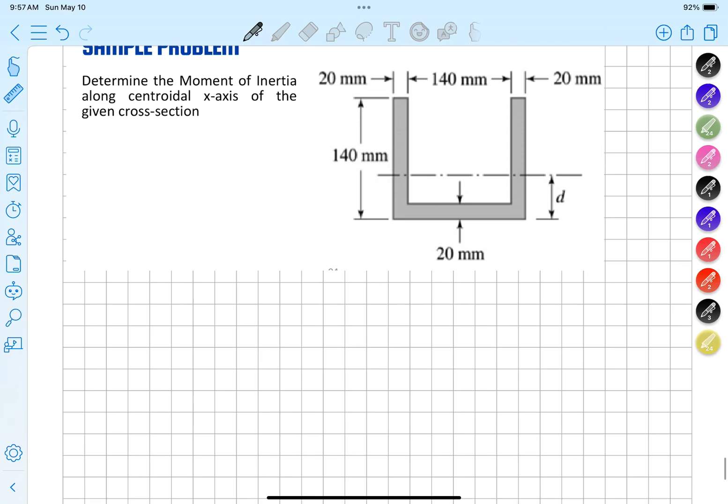For sample problem number 1. Determine the moment of inertia along the centroidal x-axis of the given cross-section. So that means, we need to locate where the centroid is.

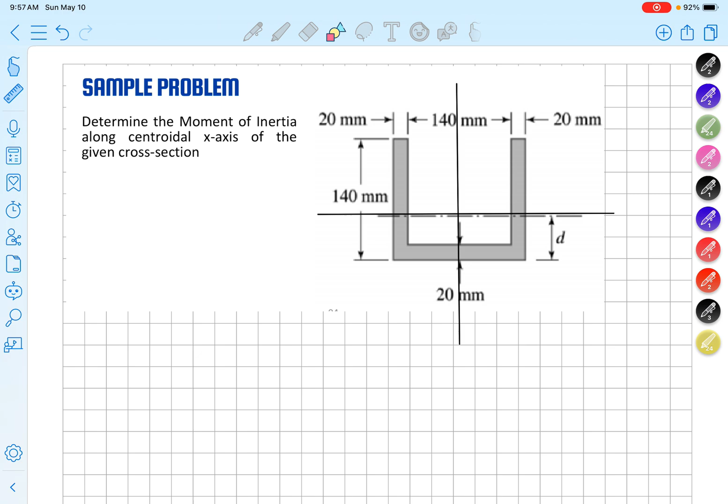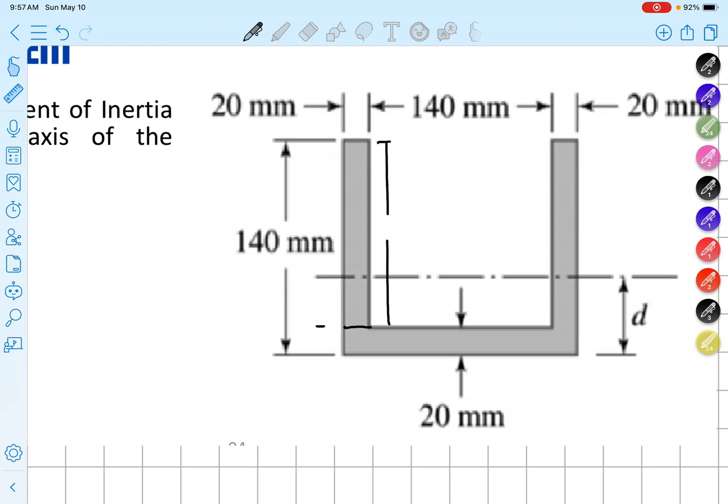If this is 20, the thickness, what is this now? So this is 120. If this is the same, this is also 120. And if this is 140 in the middle, plus two 20s on the sides, this is 180.

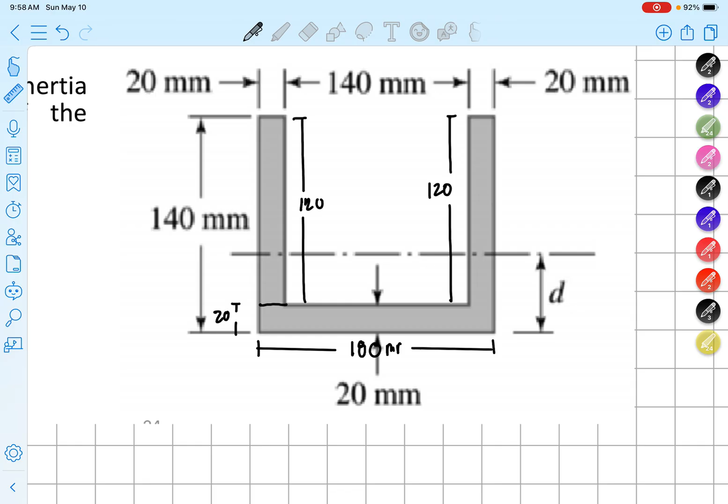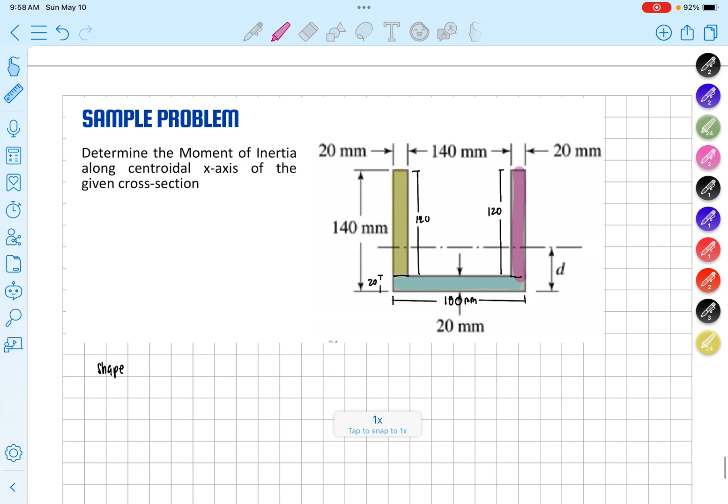So this is what we'll divide. This is shape 1, and then we have shape 2, and shape 3, which follow next to each other. So we have shape 1, 2, and 3. This is 1, this is 2, this is 3.

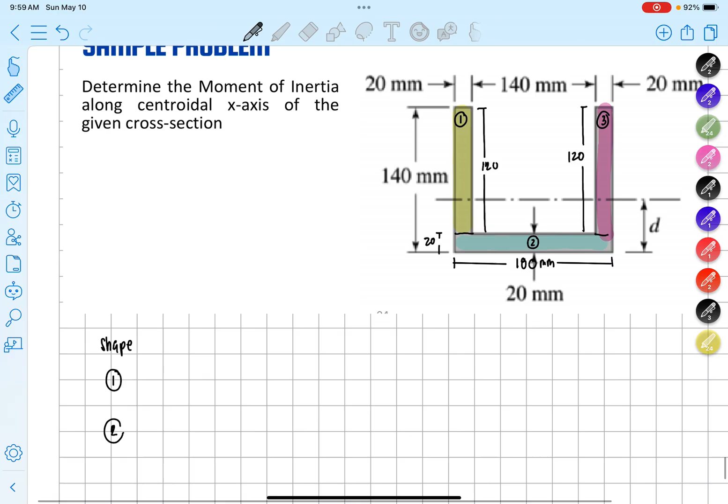For shape 1, we have 1, we have 2, and then we have 3. For area, what is the area of 1? We have 120 times 20, which equals 2,400.

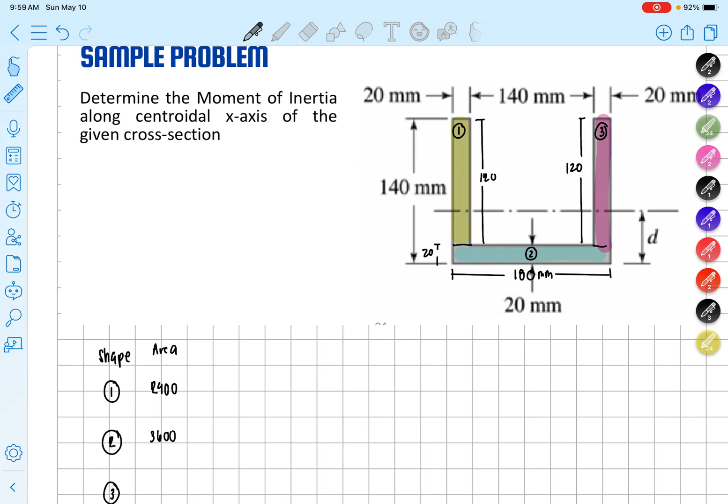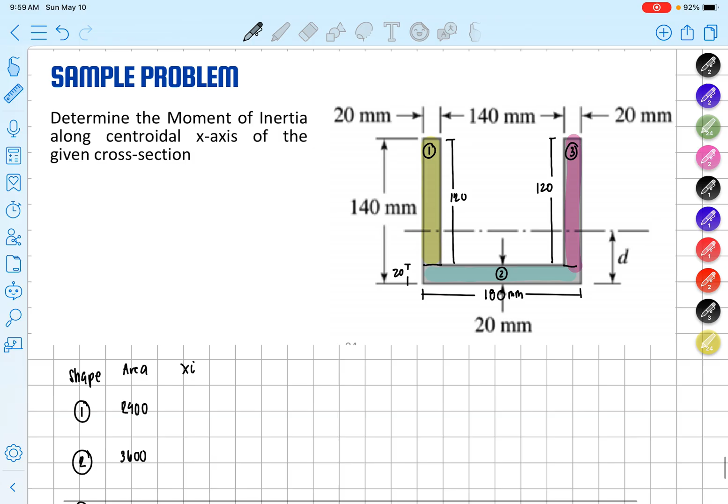What's the area of 2? We have 180 times 20, so that's 3,600. For area 3, it's the same as area 1, we have 120 times 20. Now for xi, distance from... let's place our reference axis.

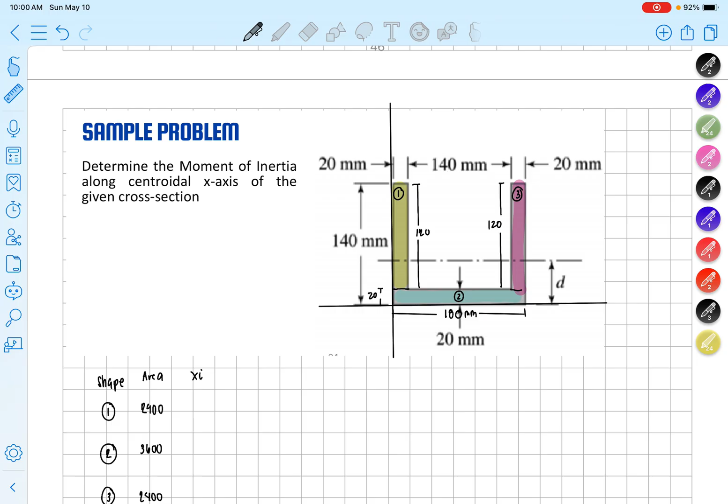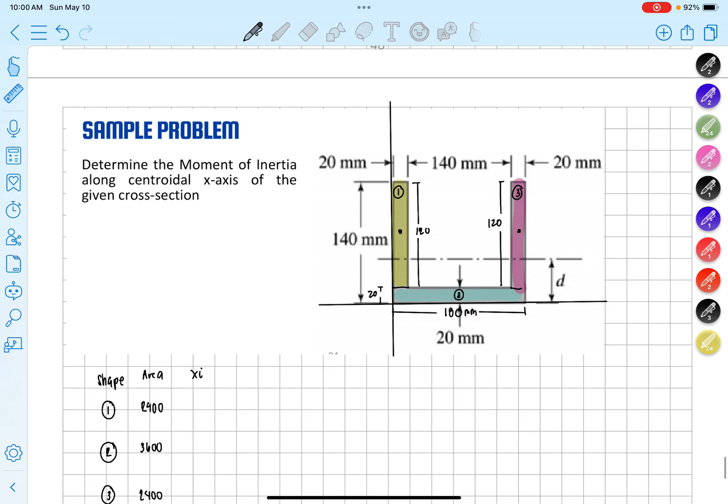From here, we locate the individual centroids. That's the individual centroid, one in the middle here, and another in the middle there. So what's the distance of this? That's 20 over 2, so this is 10.

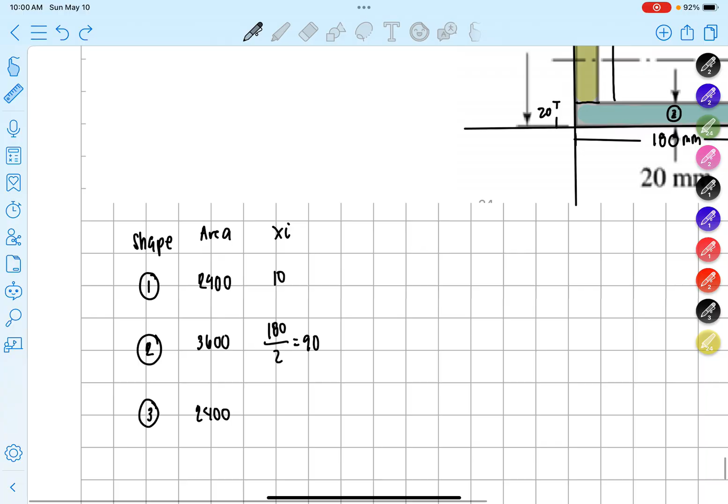Next we have AXI. In this case, 2,400 times 10 is 24,000. 3,600 times 90 equals 324,000. And for 2,400 times 170, please double check this since it's not the centroid as our reference - that's 408.

So for our total area, we have 24 plus 36 plus 24, giving us 84. And for the total, this is 24,000 plus 324,000 plus 408,000, which equals 756,000.

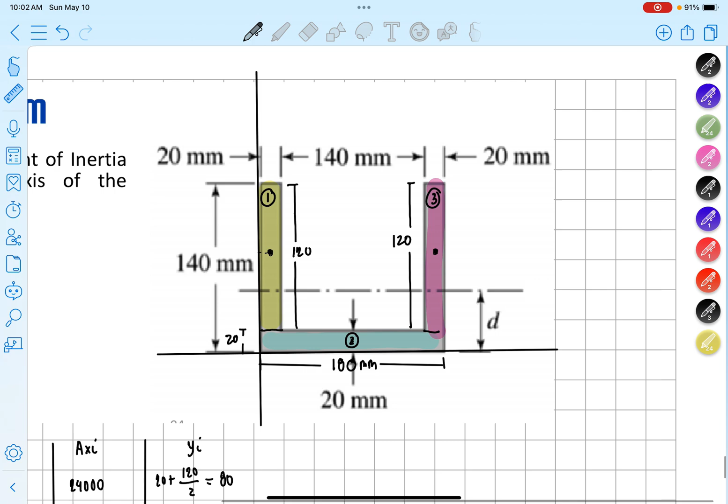And again, let's compute the AYI. Just multiply - 80 times 2,400 (area times 80). So 24 times 80 equals 192,000. How about 3,600 times 10, that's 36,000. And we have 2,400 times 80, again 192,000. Adding these: 192 times 10^3 plus 36 times 10^3 plus another 192 times 10^3, totals 420,000.

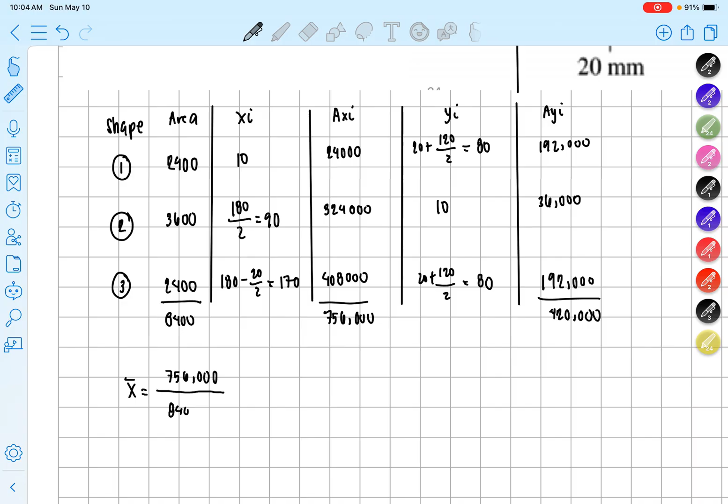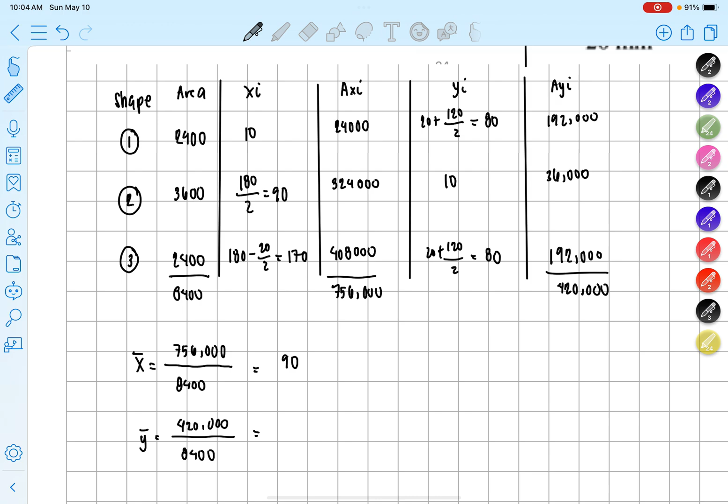So to get x-bar, this is simply equal to 756,000 over 8,400. And for y-bar, that's 420,000 over 8,400. This equals 90, if I'm not mistaken, and this equals 50. So that's your centroid, 90 and 50.

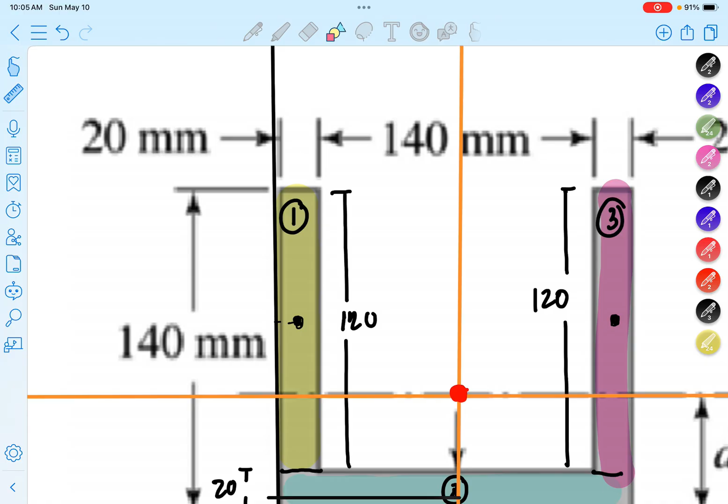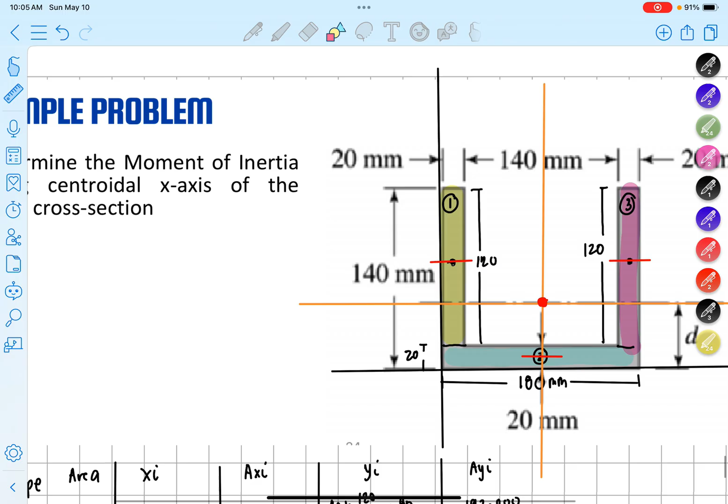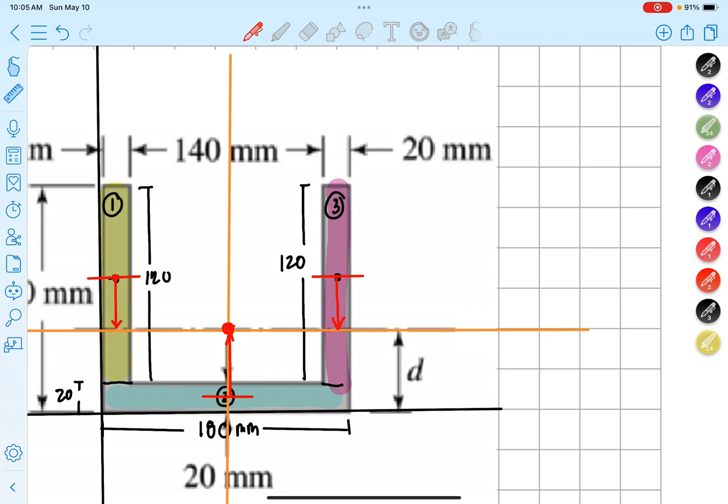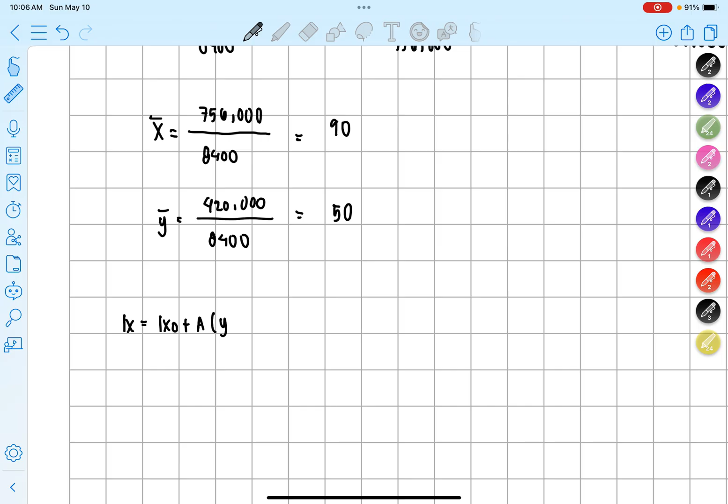Dadali natin dyan yan, papunta doon. By the way guys, yung D na to, ito yung tinatawag natin as ating y bar. Kaya kung mapapansin nyo kanina, yung formula natin, pagka IX na hinahanap natin, this is simply equal to IXO plus area y bar minus yn square.

Okay, so ibig sabihin, isa-isahin natin ngayon. Ang total natin, IX is simply equal to IX1 plus IX2 plus IX3. So ibig sabihin, pagka-plus-plusin mo ngayon, yan.

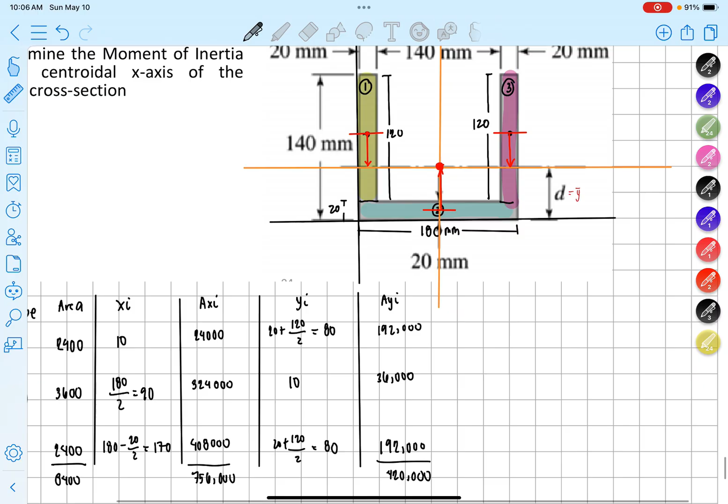Ngayon naman, for IX1, isa-isahin natin. Ano ngayon yung IX1 natin? Yung IXO. Alam nyo na yung shape 1 natin, etong part na to, is a rectangle, di ba? At para makuha natin IX niyan, based on the formula, yan yung BH cube over 12, base times height cube over 12.

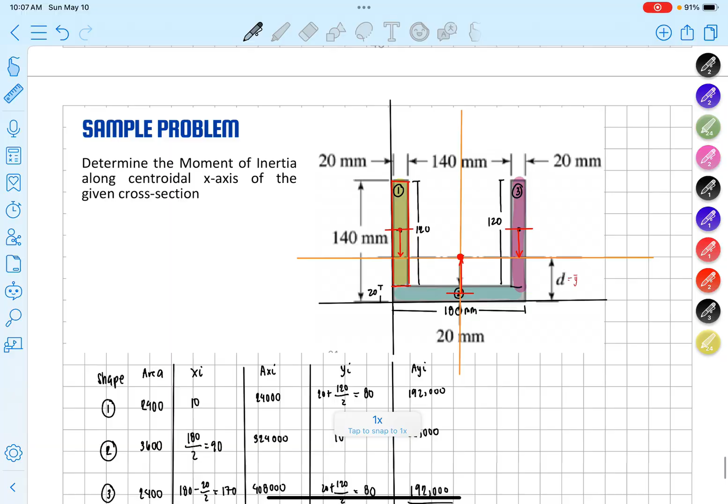So pag IX yung kukunin natin, technically pag sinolve natin yon for IX1, we have BH cube over 12. Ang base natin doon is 20, tama ba? Ito, 20 to. And then yung height natin is 120. So we have 20, height na 120 cube over 12.

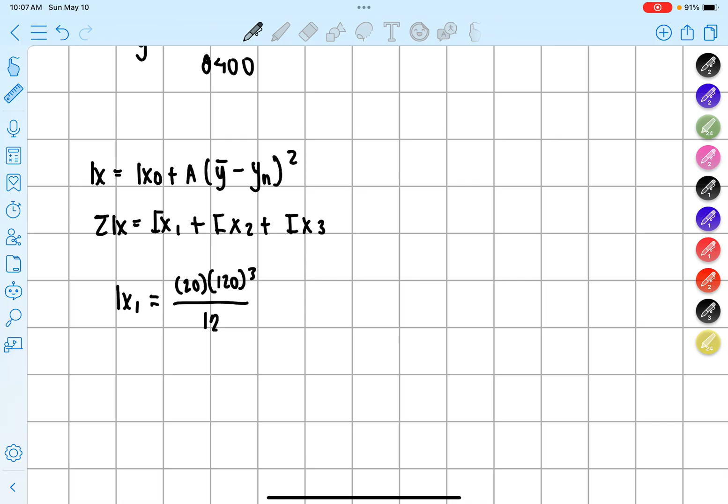Tapos tingnan nyo na lang, kaya maganda yung naka-table, plus area tayo, di ba? Ito yun, no? So ito, nakuha na natin yung individual centroid na formula.

Punta tayo sa area ngayon. Ang area natin, guys, for shape number 1 is 2,400. So ibig sabihin, we have 2,400. Ngayon, ano yung y-bar? Ang y-bar natin is 50, di ba? 50.

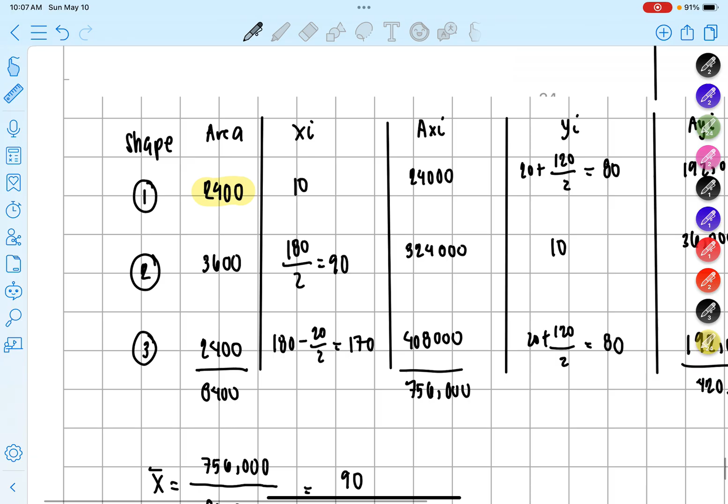Minus, ano ngayon yung y natin ng una? Di ba ito yung 80? So technically, this is 80 square.

Sir, paano po ba nangyari ito? Di ba guys, this is the distance. Ibig sabihin yun yung distance neto. Tingnan nyo, by the way, square yan. Di ba, ito yung portion na to. Ito yun. Ayan yun, ito yung distance na kinukuha natin, yan yung y bar minus y.

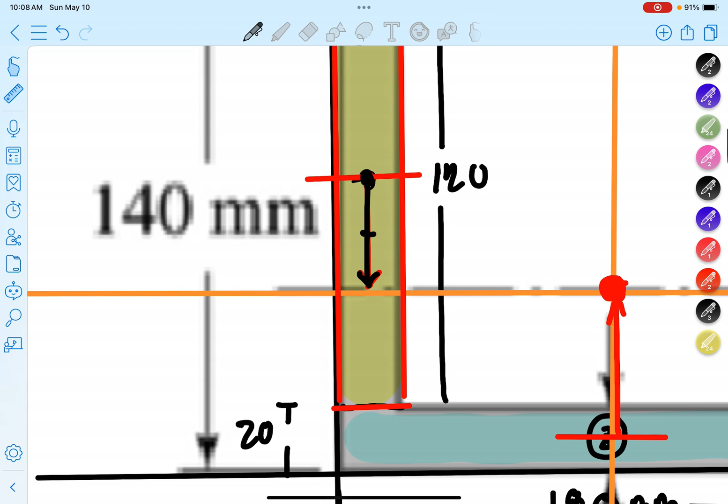Sir, paano nangyari yun? Kung titingnan mo, di ba ang y bar natin is hanggang dito? Tama? Ito yung y bar natin. Tapos yung yi natin na yan, di ba itong yi natin yan, di ba yun yung kinumpute natin mula sa pinaka-reference natin? Kaya tingnan mo, yung y natin na yan is 20, meaning 20 plus kalahati ng 120 na locate natin, na 80 yan.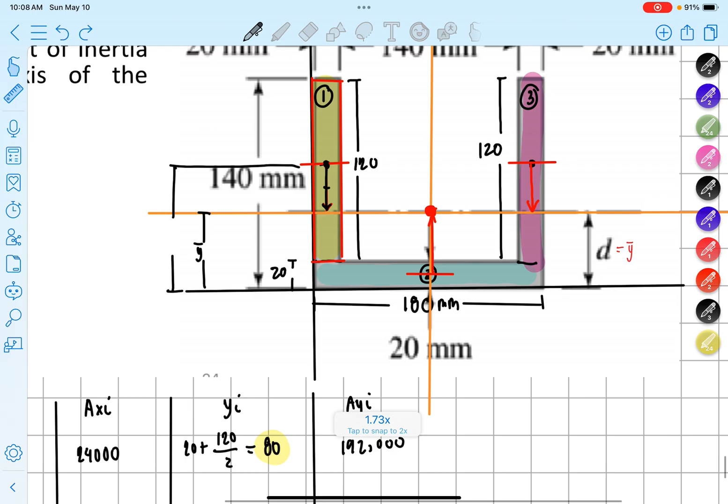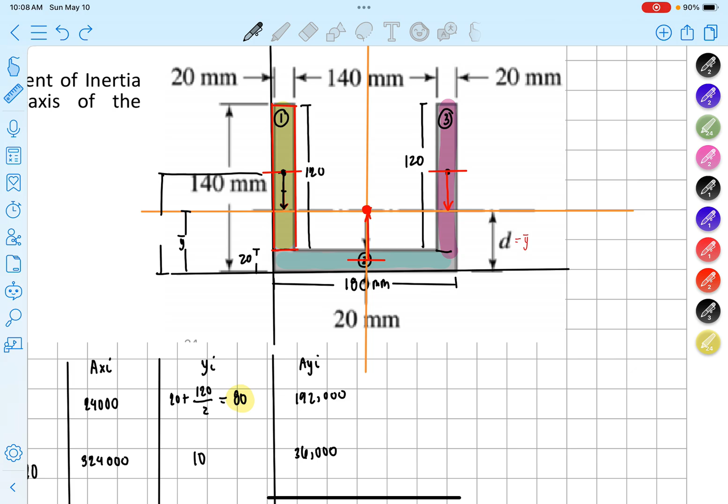Sir, di ba dapat 80 minus y bar? Okay lang yun guys, na y bar minus 80 para hindi na kayo magbabali-baligtad. Bakit? Kasi naka-square naman yan. Kung titingnan nyo, sir, di ba dapat 80 minus 50 yan?

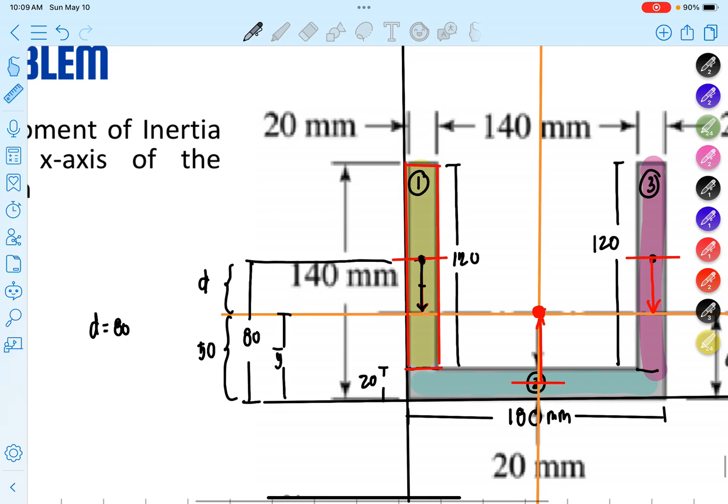Kasi, ibig sabihin, kung kukunin natin, sir, yung distance na to, itong distance d na to, at ito ay 80, at ito ay yung y bar natin na 50, di ba, yung d natin dapat is 80 minus 50. Tama? So dapat po pala, sir, yn minus y bar.

Guys, okay lang yun. Bakit? Kasi naka-square naman, kahit pagpalitin nyo yan, okay. Sige, 50 minus 80 square. Ilan? 50 minus 80 square, quantity 50 minus 80 square. Ilan yun? So 900. Sa pagpalagay mo na 80 minus 50 square naman, 900 pa rin. So technically, mas okay na nakafocus na lang kayo sa ganitong formula para hindi na kayo malito. So y bar natin is 50.

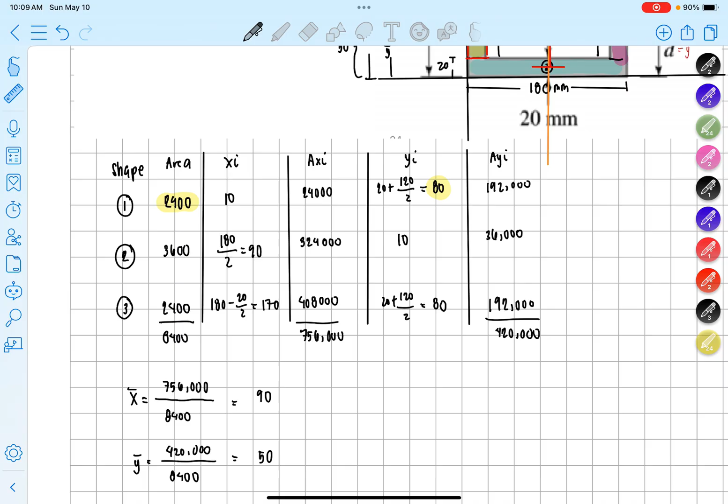Yung yn natin or the distance ng individual centroid ng area 1 natin is 80 from the reference x-axis. So ibig sabihin, this is equal to, mahaba-haba ito, so we have 20, 120 cubed over 12 plus 2,400, 50 minus 80 square. So this is 5,040,000.

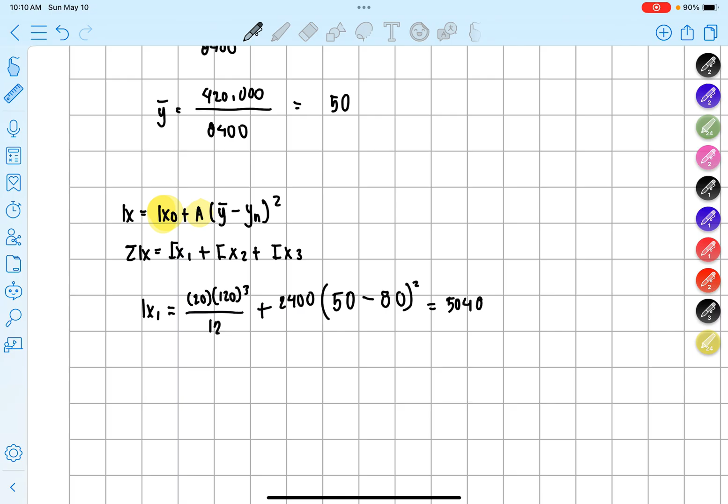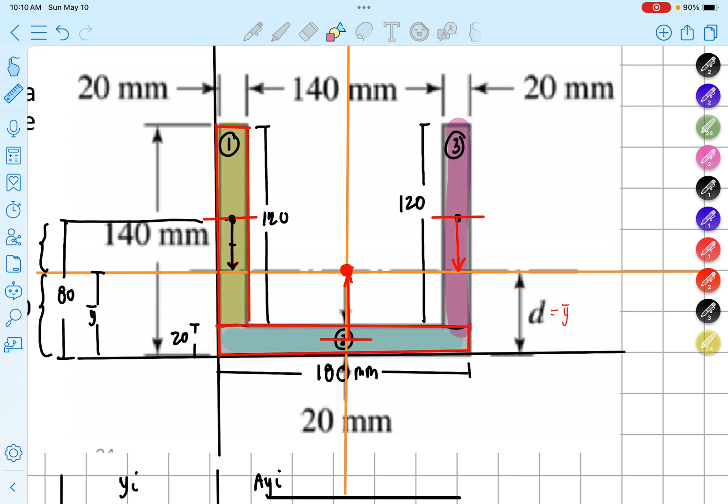For IX2 naman, di ba simply BH cube over 12, kasi IX kinuha mo pero magkaiba na. Ito ngayon yung area na kino-consider natin. Area na yun. Ngayon, ano yung base niya? 180 yung base niya. Ang height niya ngayon is 20 lang.

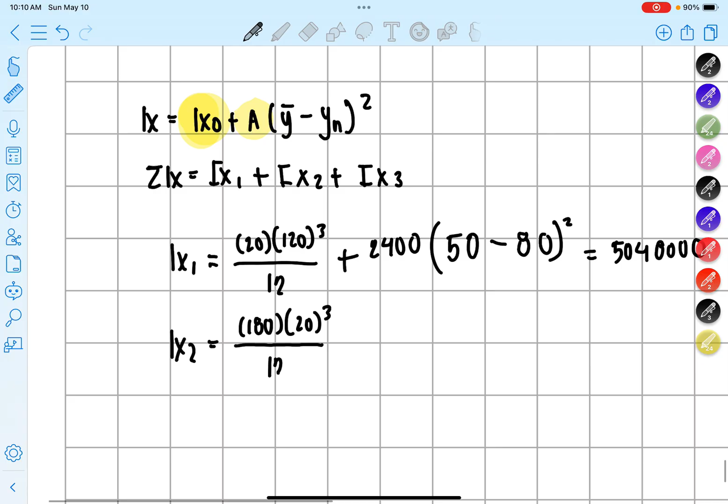So ibig sabihin, we have base na 180, 20 cube over 12. Ano yung area 2 natin? Ang area 2 natin is eto, we have 3,600. Ngayon, ilan yung y bar natin? We have 50. Ilan yung y natin doon? So we have 10.

10 square. This is equal to 588. Tama ba? So we have 180, 20 cube over 12 plus 3,600, 50 minus 10 square. So 5,880,000. And then for the IX3, di ba same lang sila guys nung first natin?

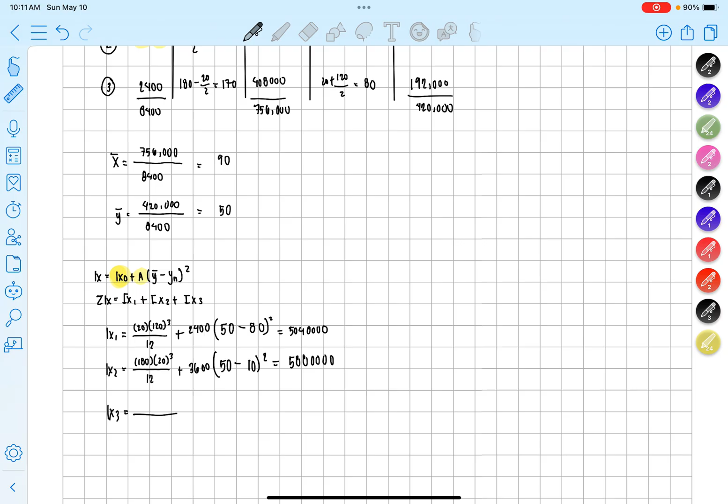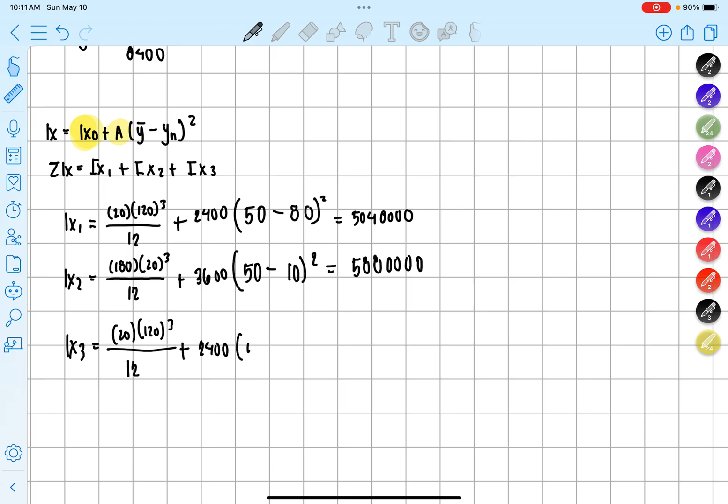Di ba itong area na to is same lang sa area 1. Opo. So ibig sabihin, same lang sila, gagayahin mo lang yung IX1. So we have 120 cube over 12 plus 2,400 minus 80 squared is equal to 5,040,000.

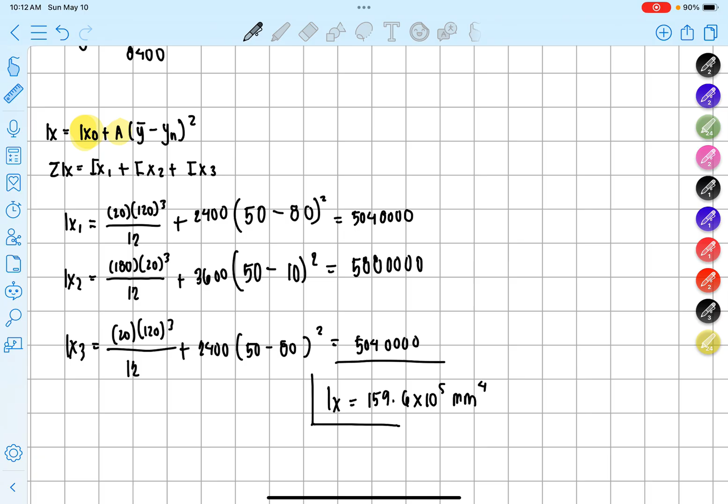And then, para makuha mo yung total IX nila, this is equal to 5,040,000 plus 5,800,000 plus 5,040,000. So this is equal to 1596, or sa scientific notation na lang natin, this is 159.6 times 10 raised to 5 mm raised to 4. Ang unit natin guys for this case ay mm raised to 4. So that's for sample problem number 1 natin.